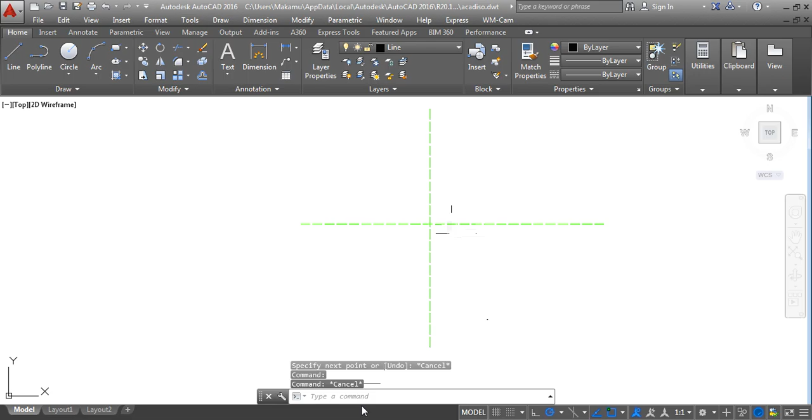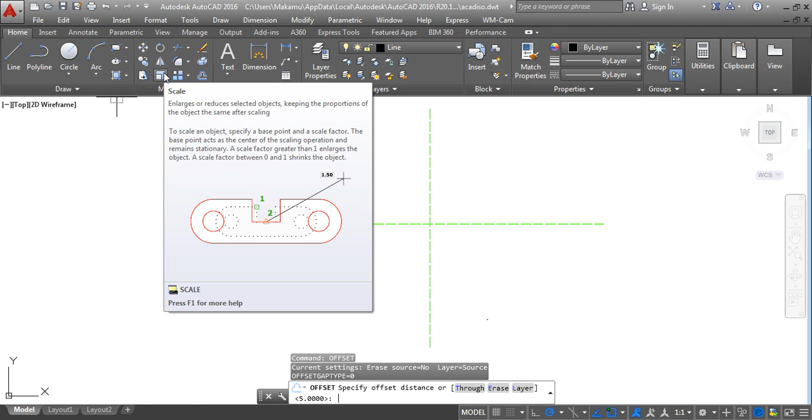Bear in mind that to get the distance from the two circles, from this one to the other ones, you offset the middle center line to the left and middle center line to the right. To get the center mark of this circle, you offset 34 to the downside. So let's do it. You see, offset, enter, 34, enter. And then that's 34. Don't stress because it's too small. And then offset, enter, 40, enter, so that you can get the other mark of the other drawings.

So now we can make our circles. We know we have 29, and then we know we have the inner one, which is 15.7. Then we have the other side, we have 8, and then we have a distance 4 from this 8, which attaches the other bigger circle. This is what I mean: the distance from the smaller circle to the bigger circle, it's 4. So we have that one as well.

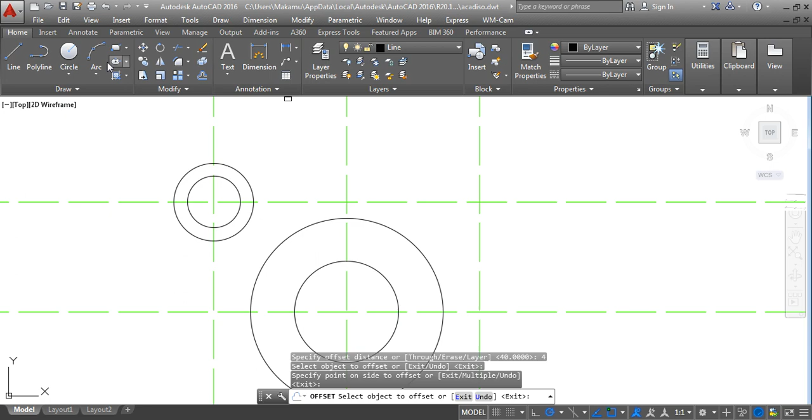So let's get back to the drawing board. What we have on the other side, we have radius 10 because the diameter is 20, and then we have radius 19 because the diameter is 39 point something. Yeah, it's 38, not 39. So now we know we have everything from this.

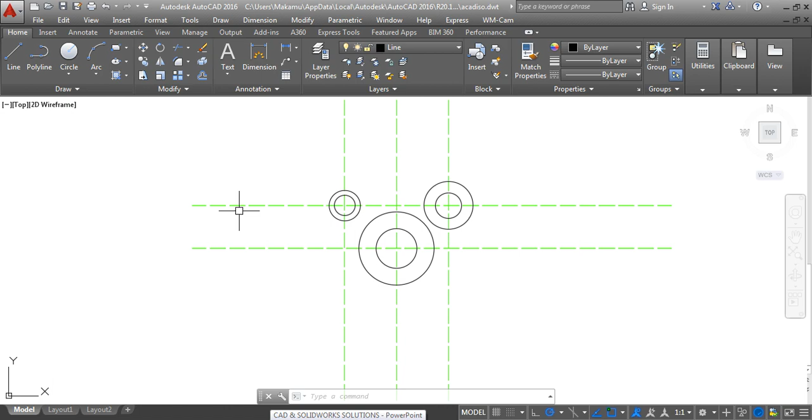So let's draw the center mark, which goes directly to the line which is tangential to this, and the line which is tangential to the two circles. Obviously we have 2 points, we have 2 marks, so we can just draw it simply. This side it's 100, this side it's 50, I think.

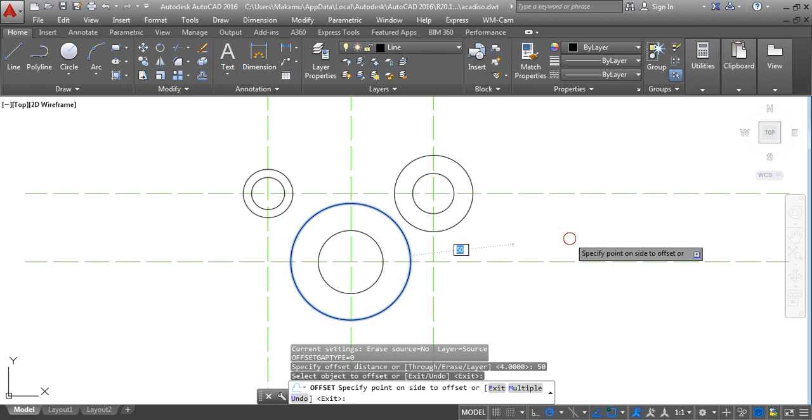Yes, it's 50. So let's say offset, enter, 50, enter. You have 50, wherever the two meet, you get your center mark, and then you offset 100, enter. Use the same ones. So if there's a method that you can use, if you want to use... I don't normally like it too much, but this is sort of another method.

If you want to use arc to draw, there's 3-point arc: start point, center, and end. Let's say we start here, we go to the center, and then we have to move in an anti-clockwise direction, or clockwise direction, to do it.

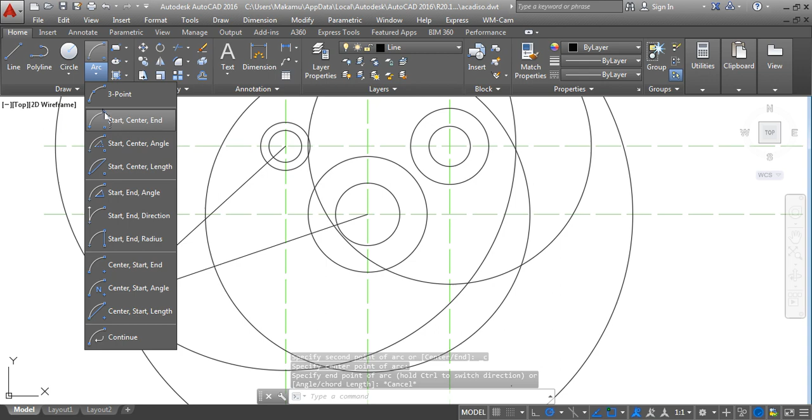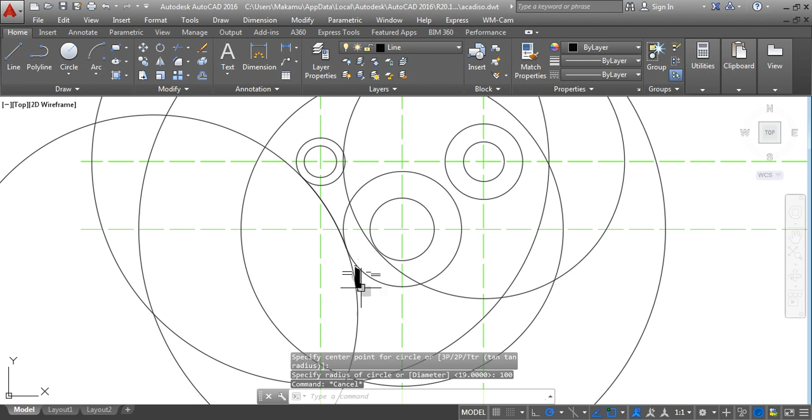So you should have said start, center, and then here's our arc. It's complete. It's exactly the same thing as if you say from this I want to make it 100. You can see it's moving exactly the same thing, so it's reducing the time.

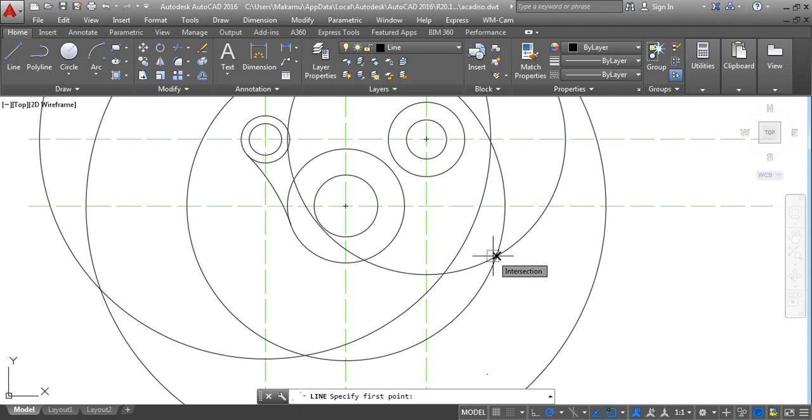That method is a little bit faster, as you don't come back for trimming and trimming and trimming. But obviously you have to make some guidelines. You use a guide from here to there, another line from here to center. Remember we move in an anticlockwise direction, so at some point it's a little bit confusing.

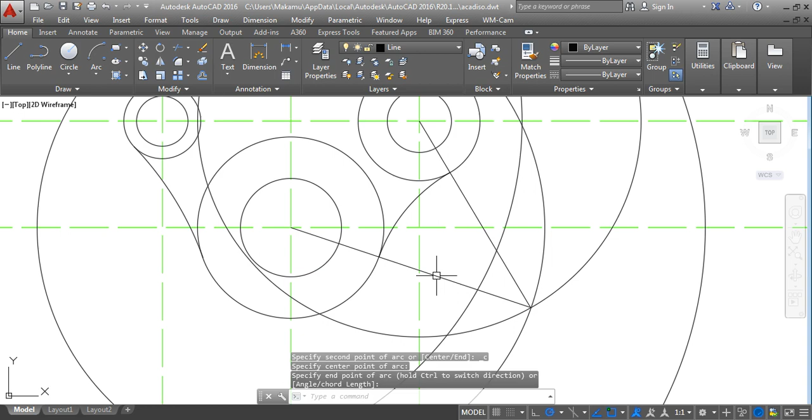So you start this point to this point, and then now we can delete this. We delete those bigger circles to remove some confusion, and then now we can say trim. If you want to trim, enter, enter. We can just trim this as well, and then we trim this, we trim this. Yeah, we can trim up to there.

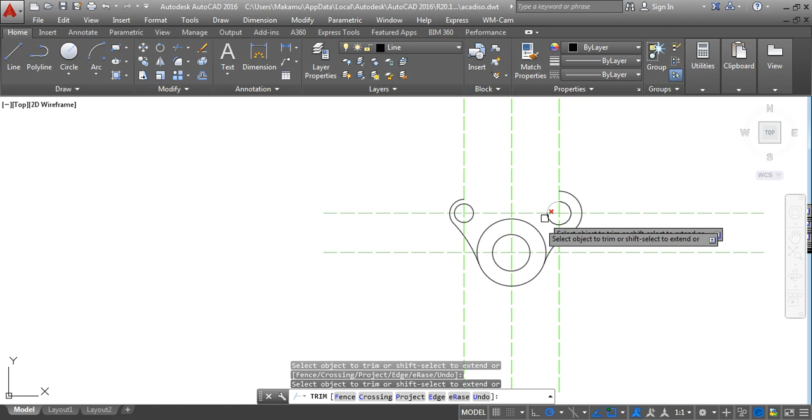As far as we know, the bottom side is exactly the same as the upside. So let's just say offset. We need the distance from here to there, it's 34. Offset, distance, 34, enter.

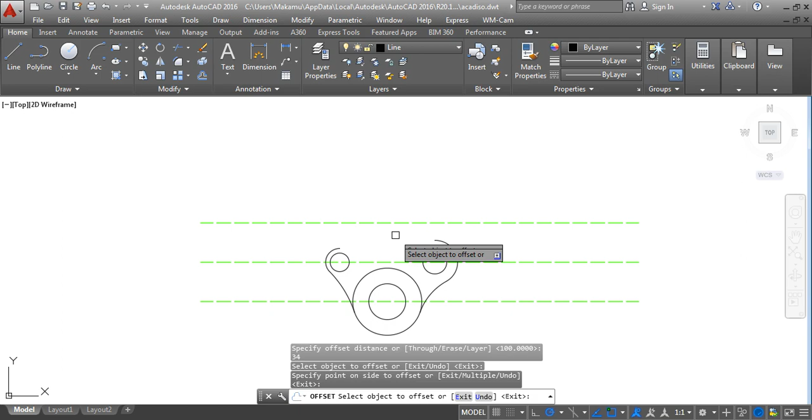The distance from here to the center mark - I don't know why I deleted this, it's still a guide for us. Center, and then now we can highlight the bottom side, or even if you don't highlight the other one, you can just highlight only this, because it will give you an arc on the other side. Say you use a mirror, you can use center marks, doesn't matter as long as you're in the center line.

And then I say trim. Now we trim the top, the left and the right side. So now at least we are exactly close to the finish line. So what we have to do now is to come up with this line, these circles, as far as you can see.

So a little bit of trick here. You're not given an angle, but by the look of things, this looks like if this is my 0-degree line, moving from here to this first circle, it's 30. That's how I see it. And then this second one, from 0 degrees, it's 45. That's what I see. So let's start with the bottom one, which is 45.

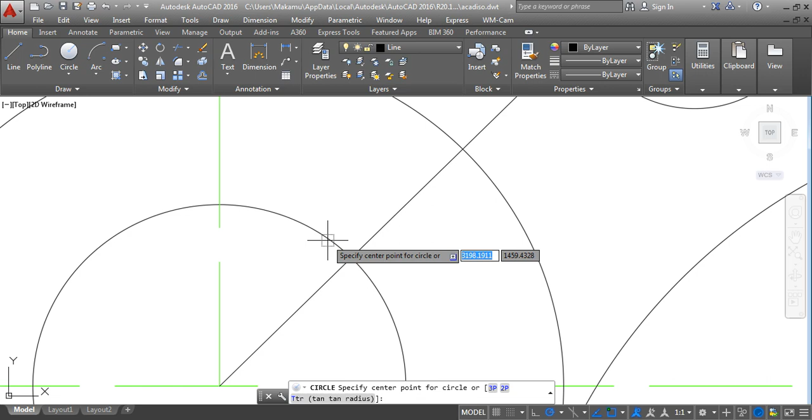So let's check, it's radius 4. Enter. And then I know as far as I can, I have 4 here. All the circles are equal.

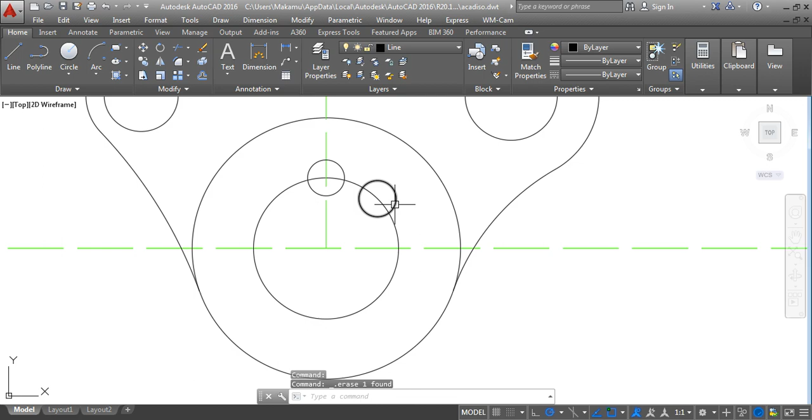So now we can use a mirror, because I know most of you have wanted to use a mirror before, so but you can still use it. Let's check if you are exactly in the same direction. Yes, it's exactly the same. Sorry about deleting it. Let's say copy, highlight, and then you say mirror.

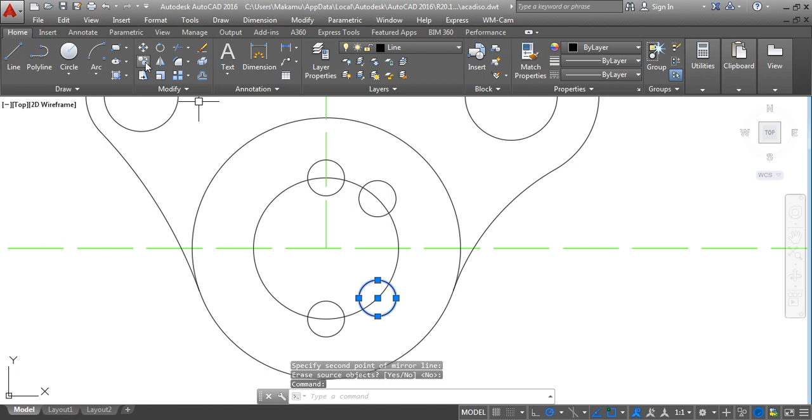Enter. This one you can say copy from center. Make sure it's exactly in the center as well. So now we can mirror the other lines, the other circles. Enter. So we have something exactly the same as what they're expecting from us. And then this one, we only have 1, 2, 3, 4, 5, 6 circles, but radius 3. And this we said it's 30 at an angle of 30 degrees.

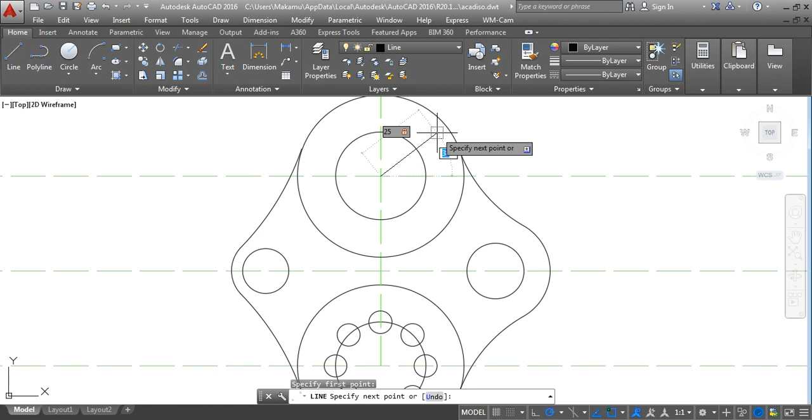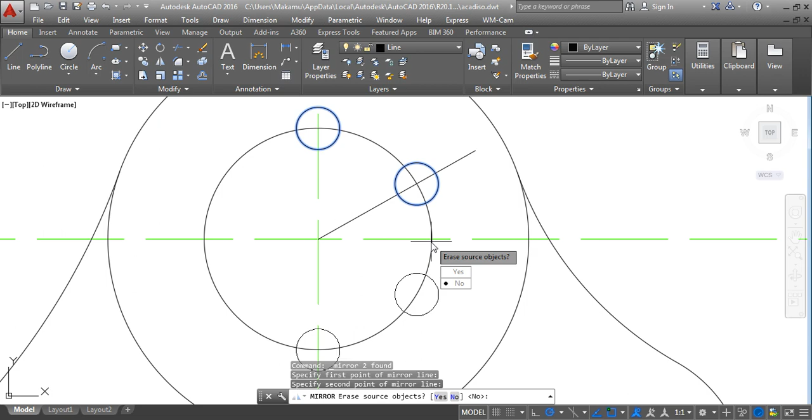So now we can make our guide. We say 25 at an angle of 30. And then I come up with this as 3. We know we have 3 as well from here to there. And then now we can use a mirror from bottom to top, from left to right, or from right to left, anyhow. Then now we can mirror the missing parts.

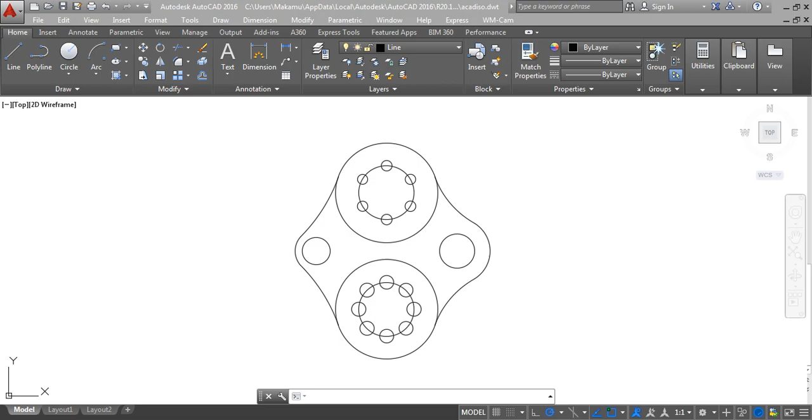So far, I think everything that we need is complete. So we can freeze the lines, the center mark. As far as you can see, this is what they're expecting from us. It's exactly as drawn from the other side.